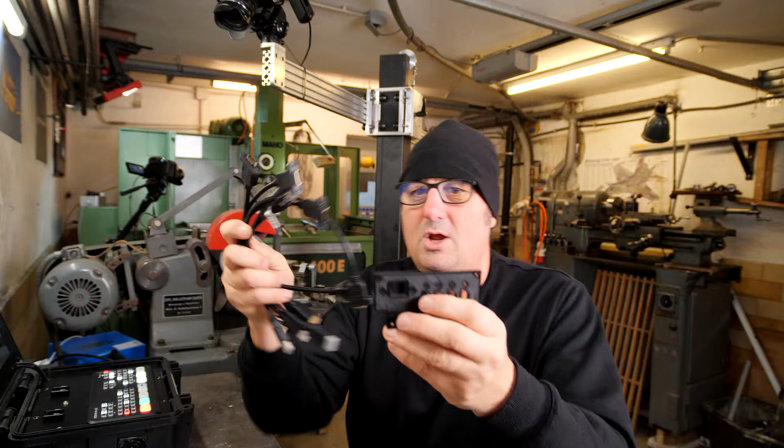So what I need to make is one of these. Basically, it's one of these, just like a closeout panel for all of these to connect into. Now, in itself, it's not a big deal, right? It's just going to be a little piece of sheet metal.

I've made things like this before in the past, and kind of hate it. You end up - drilling the holes is the easy part, but you end up sort of stitch drilling and filing and filing and fitting and filing, and it's kind of a pain.

So this time, I have drawn this up in CAD. Let me just bring up my CAD screen for a second. Yep, so I drew up this part, and made a couple of 3D printed...

Made a couple of 3D printed practice pieces. Moved a couple of holes around because my holes in the actual casing are not that perfect. Got it fitting nicely. So the next thing is to make this out of

something more rigid, which will be a piece of aluminium. So nothing too complicated for today's job, but I am going to CNC it, as Stefano's asking. That was the plan.

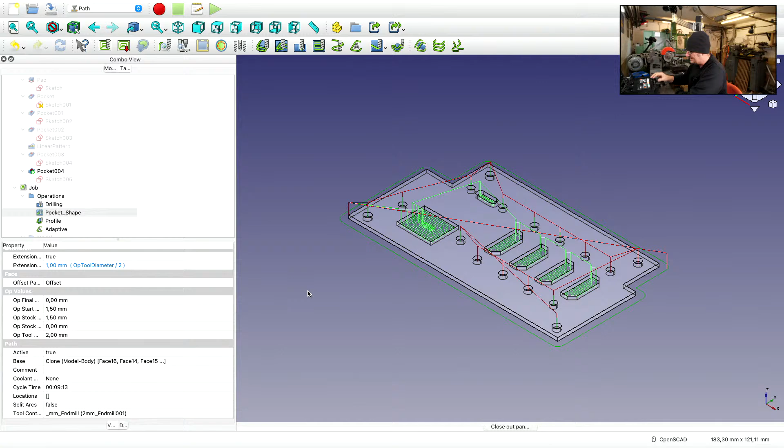Honestly, I probably should have just - I should have probably done it with a laser. You know, realistically, this part is a classic part to do with a laser, but I really need to learn how to use FreeCAD's Path software, which is like its CAM module, and I really need to practice using the Maho more. You know, if I don't use it all the time, I kind of get out of the habit of the safety skills of how to use it without crashing the thing.

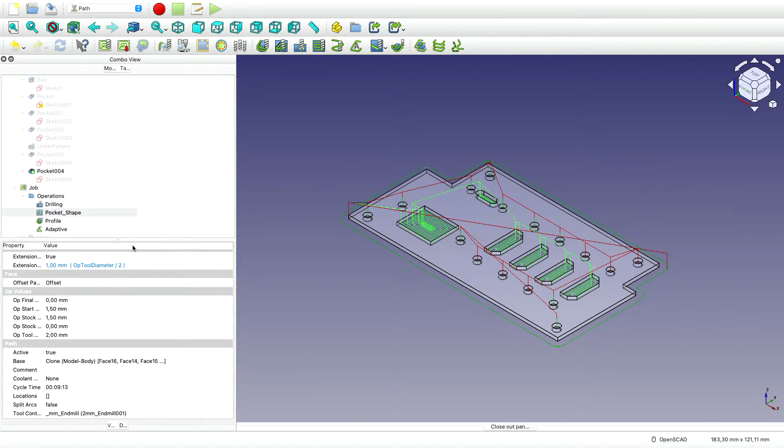So let's CNC this. One thing I find a bit weird in this program, FreeCAD, with its Path workbench, is it gives you a number of different options for how you want to do this path. Like it's given me the option of offset, which I assume is like kind of a spiral path. At least that's what I was hoping to see, spiraling into the pocket.

Zigzag obviously just goes backwards and forwards. Zigzag offset, I was assuming would go backwards and forwards to clean out the pocket, and then once around the racetrack to clear off the sidewalls. But let me just show you. I'll just select that.

So you can see it's given me a zigzag path and then going around the outside. But if I post that out, just throw that into where I've been putting all the other ones.

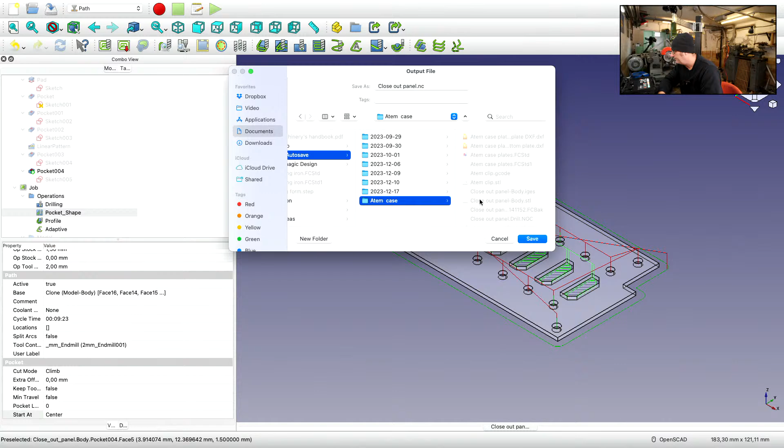So there's the program post-processed. Now let me just pop over and raise... I just need to. Oh no, wait a minute, I can get this.

What I do like to do is use a second program called NC Viewer, which is just like an online... what do you call it? An online backplotter. You know, when you go through and load it, it just shows the toolpath.

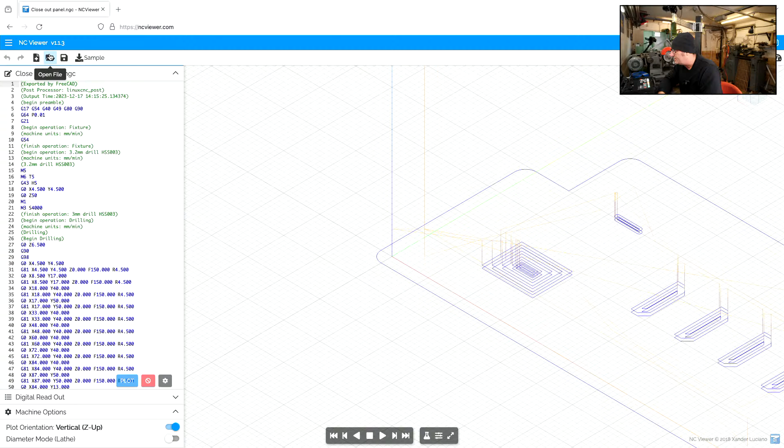So if we just load that one I just generated and take a quick look at it, you'll see why I didn't use it. First we've got all of the drilling bits, but if we come down to the pocket, you'll see it goes round the outside first and then cleans out the inside, which to me is basically useless.

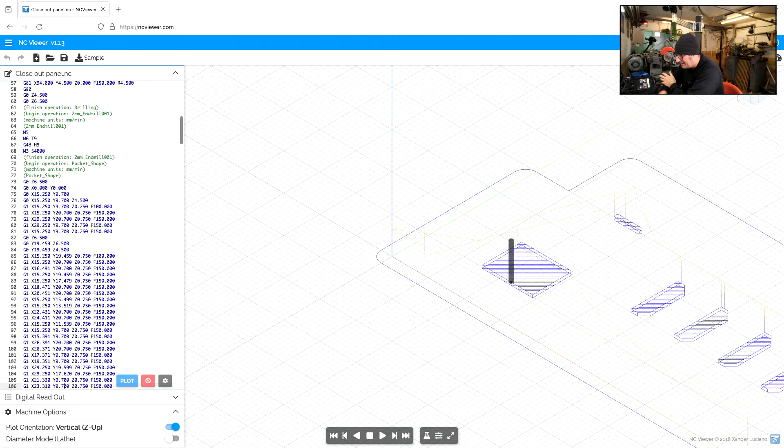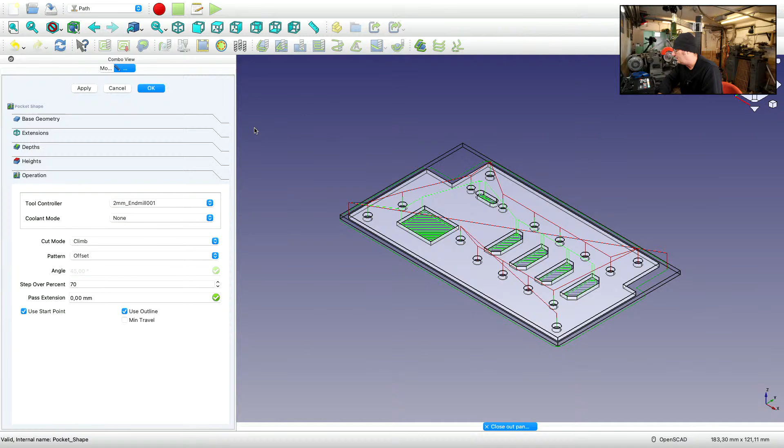So I did play around with that until I got one that worked for me, and that was the one I showed you before, which was just using offset, and once again I'm doing 2 layers. On the first layer it also went around the outside first, cleaned it all out, goes around the outside, it's kind of not really spiraling, but it goes through, cleans up the middle, then goes down a level, and then goes outwards. So that I figured was good enough, so that's what I'm using.

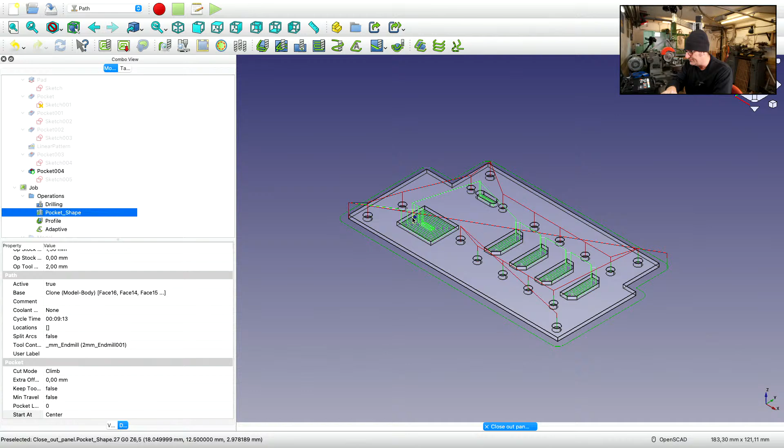Just jumping into the comments section here, what have we got to...

The ATEM Mini is slick as a hardware solution, OBS is the same in software. Yeah, I was using OBS for most of my live streams, but I just found it's a bit too flaky for me. Being a software solution, sometimes it would mute my mic when I wasn't expecting it. Just gave me real stress, to be honest.

Yeah, so that's why I switched to the ATEM Mini, and it is a pretty amazing device. What I really like about it, well, I was playing around before, I by mistake bumped the plug a couple of times, and if you switch it off or anything, it comes back really quickly. It only goes offline for a few seconds, so that's quite helpful.

Yeah, I love the manual machining, but I agree this kind of thing sucks to make by hand. Yeah, that's the way I see it too.

Fusion 360 would be great for personal use, but because I've monetized the channel, this is not considered personal use anymore. So I'm kind of stuck with either buying licenses, and honestly the channel doesn't generate enough income to cover the cost of a software license.

I've been working with FreeCAD now for the best part of a year, and to be honest it is kind of growing on me. I guess it's now trained me on how it wants me to draw and how to model, and most of the things I want I can get it to do now. So yeah, but now I'm trying to learn the CAM side of it, and that's another challenge.

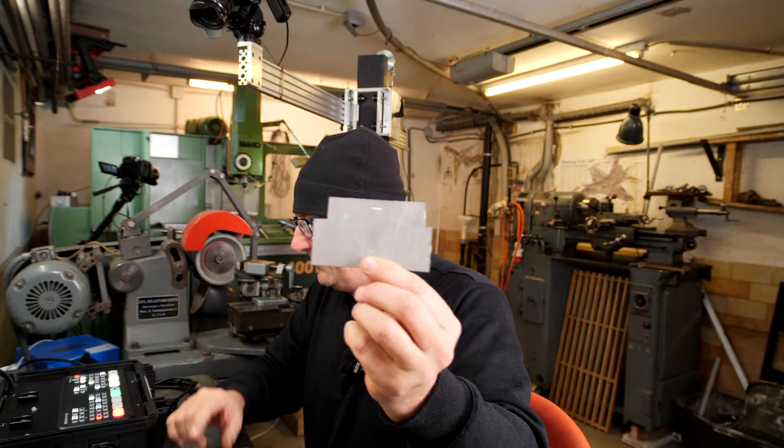So anyway, where are we at? So need to make one of them out of one of these. So let's just jump over to the Maho. As you can see, I've done some work with sheet metal before.

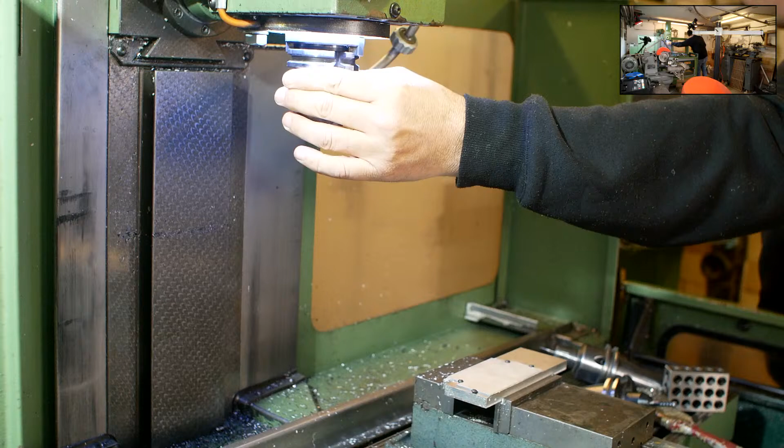So I'm just pausing here, looking at distance to go, 113 millimeters. There's plenty of space, I shouldn't hit anything. Next thing I'm checking is whether it loaded the offset of my tool. This is tool number 5, a 3 millimeter drill, and I've got an 11 millimeter offset set. That's all about what I would expect. Let me give you another angle there.

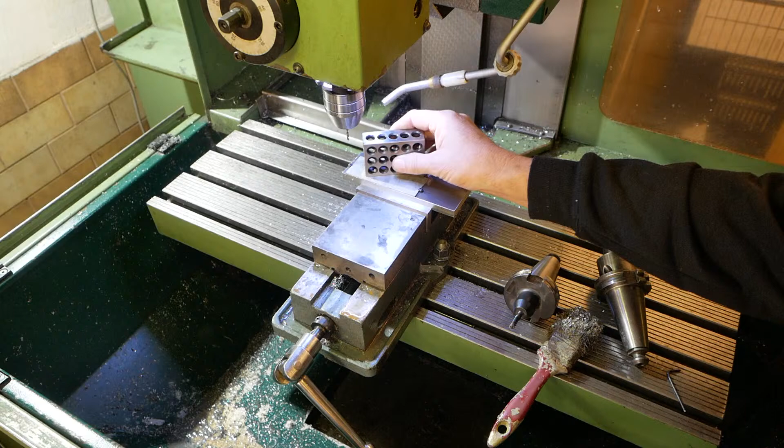Okay, take the pause off. I've also got, well, I'll show you what I've got. I've learnt to get on the feed override and just ride that down. In this case, I've set up with an optional stop, 50 millimeters above my zero. Here, zero is actually the underside of the work, not the top side. So if my tool offset's correct, I should be about 2 millimeters below the level of this 50 millimeter block. That's good. Now it's going to get loud because it's going to start the spindle at 4,000 RPM and start the drilling.

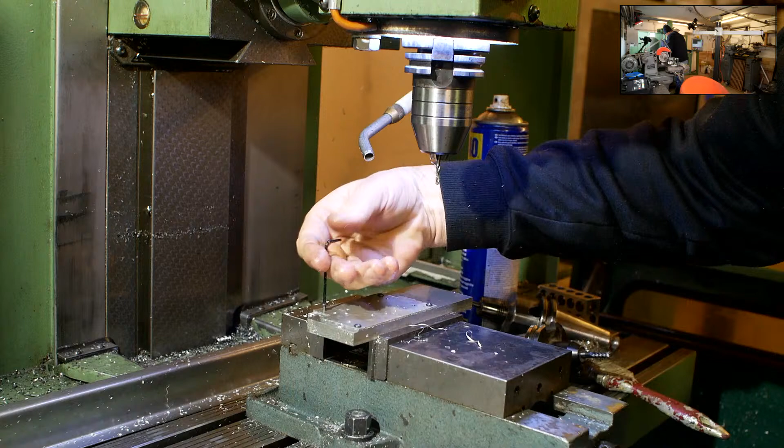When I got the Maho, I never touched the settings in the Indramat. All I did was adjust obviously the PID control loop in LinuxCNC, but I assumed the original settings on the Indramat from Maho would be better than anything I could come up with by playing around with it, so I never adjusted anything in there. But it may well be that an analog system drifts with time, and you probably should go in and retune it regularly or something, but I never have. So as I say, I just have to live with it making this slight oscillating sound.

Okay, right, quick move back, let's see what's happening in the comments section. Are you still screaming at me, or have you stopped?

Yeah, there is that companion software that I'm using to control things, on the Stream Deck, which of course is tethered to my computer. But there's a phone app that I could use, which I can really see would be quite handy here, so yeah, it's on my list of things to do. It's just not really got to the highest priority yet.

Can often run the camera while he live streams. Yeah, I probably should get our number one fan Nico over and get him playing between the cameras.

Okay, so that was my first toolpath, let's go and look at the second one. I guess I'll throw that back on as well. So I did save them as different toolpaths, so I just have to load the second one, which is the 2mm end mill pocket. Okay, once again we're going to start with a tool change.

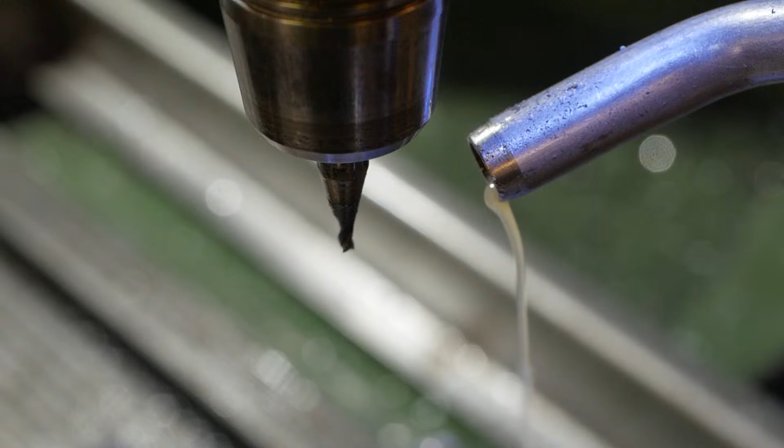Right, thanks for sitting through that. That was kind of painful, wasn't it? A bit slow.

It would be really nice to get one of those speeders, a 40 taper tool with a planetary gearbox, giving like a 4:1 speed up ratio, and then driving ER collets. They do come up sometimes. I've been very tempted to get one, but I've also heard they're pretty unreliable. The other option is to make up an aluminium bracket to clamp onto a 40 taper tool holder and offset a high-speed spindle to the side for cutting this aluminium. Guess we'll see. I'm sure I'll do something like this sooner or later.

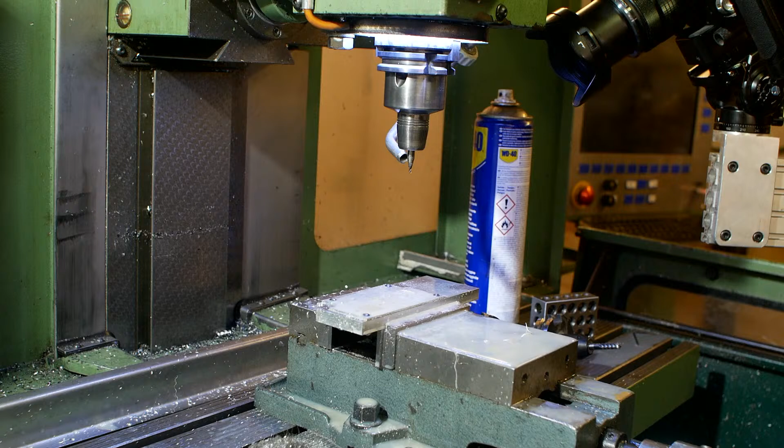Right, let's go over here, and next I'll just move this bit out of the way. The next thing we need to do is mill around the outside, and that toolpath is much faster. Just let me load it.

For this toolpath, I'm using a 6mm 6-flute carbide. I think I got this end mill from Boeing surplus about 20-something years ago, but I'm not exactly sure. Anyway, let's run this. This is pretty fast because I've got about an 800mm per minute drag race around the outside of the part on this one.

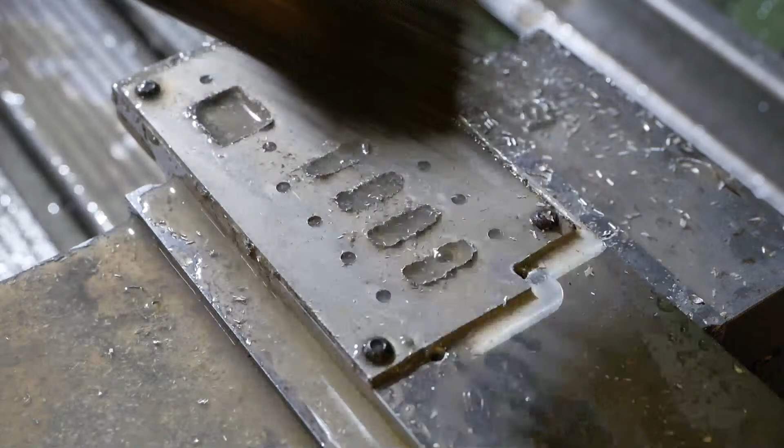Hideous burring. But hopefully it'll do the job. Well, actually, I might whack that with a file while it's still bolted down. Just a sec.

Yeah, it really does kick up a very thick burr. I'll probably paint this black anyway, so I'm not too worried about the actual scratches. This aluminium was already scratched before I even chose it. So for this job, once it's got paint on it, no one's going to notice. It's not like an aircraft or anything. They're a little more notch sensitive than breakout panels.

Okay. Once again, good time to go and replace that beer while I'm just unscrewing all these.

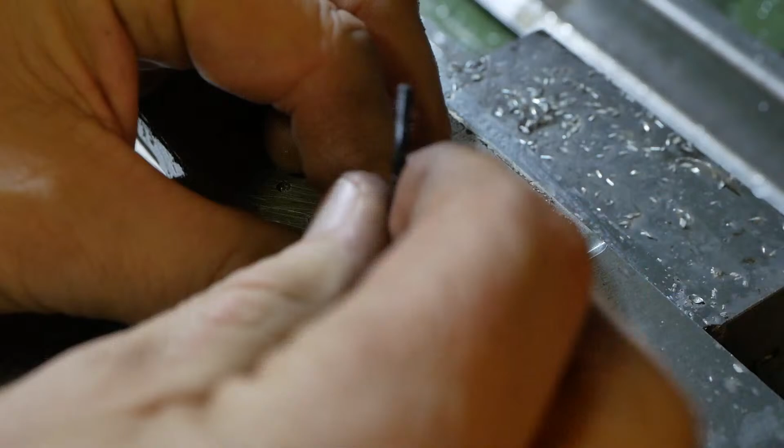I think I'll probably post something to the FreeCAD forum just to ask whether there's a simpler way to come up with a more efficient toolpath, I guess. Like having this thing spiraling in from the outside makes no sense to me whatsoever. And also having that zigzag path, first starting with its perimeter and then doing the zigzag, also seemed pretty pointless to me. But what will probably come back is I'd assume the designers are going to come back and say, nope, you used it wrong. And I'm assuming there probably is an easy way of doing this.

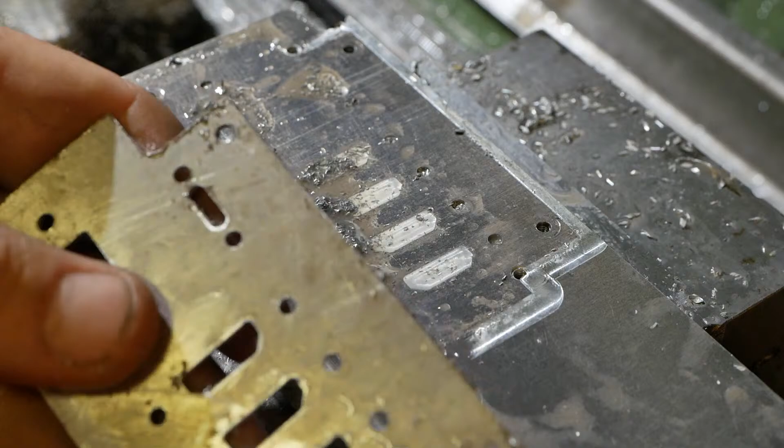But these burrs knock off reasonably easily. Where's my rag?

Right. That's what it looks like finished. Let's do a test fit.

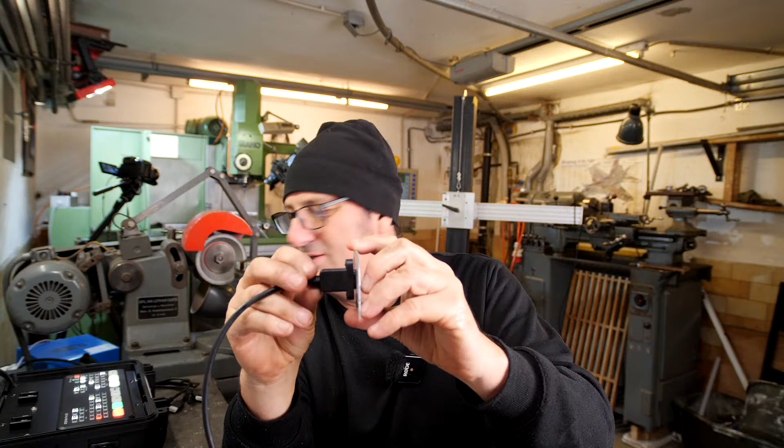Just like I bought one. Actually, no, I think it's actually designed so that you should have a bigger slot, because it turns out there's a plastic lip at the bottom which I didn't notice when I was designing it. Actually, I think I'll just leave it. I'll just bolt it up like that. It makes no difference to the function, and yeah, I'll just leave that.